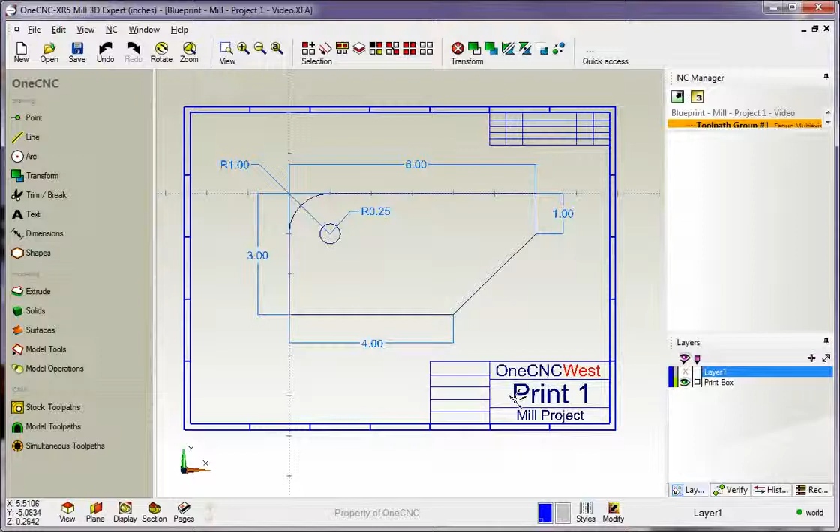Hello, this is Patrick at OneCNC West, and what we're going to do in this training video is start to take a look at creating parts using OneCNC geometry.

A lot of times you might be getting your part files already created using electronic file formats like IGES. But in these examples, I want to show you what it's like to simply create geometry within OneCNC. You'd probably have something like a blueprint, maybe a Mylar. In my example, I've got our blueprint on a separate layer called Print Box. You don't have to do this, it's just for training purposes, so I'm on track as we're building our model here.

Another tip I'd like to point out is that with creating geometry, you always want to see if your parts have fillets and chamfers. If they have fillets and chamfers, save those for last, because OneCNC provides many tools for easily creating them. So we'll create this rectangle first, then put the fillet and chamfer in, and end the video by putting a hole right at the very center of this fillet.

If we look at the blueprint here, we can see that the dimensions are 6 inches by 3 inches. I'm going to turn the blueprint layer off. For more information regarding layers, check our layers video dedicated to that on this training CD. So we want to create this rectangle 6 by 3.

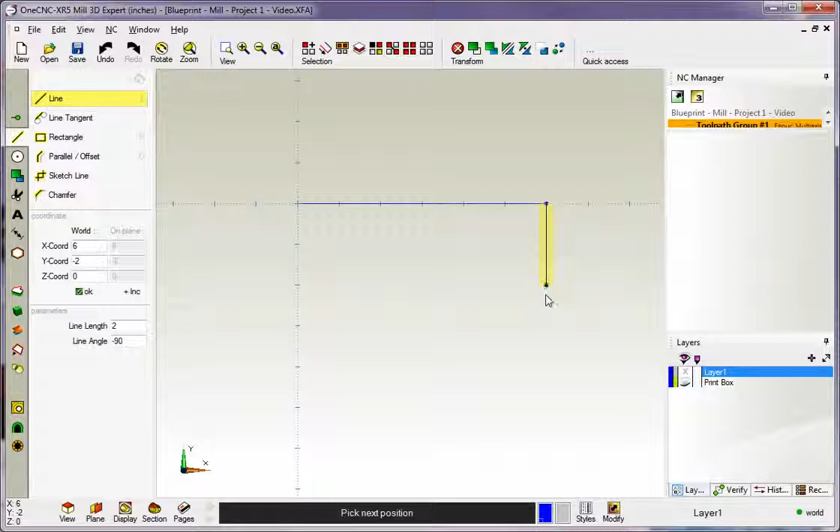There's lots of ways to do that within XR5, let me show a couple of them. First off, I'm going to head to Line. Because our dimensions are fairly simple, 6 inches and 3 inches, we can just digitize this by grid snapping. I can left click the datum, come over to 6 inches and left click, come down to -3 on Y and left click, back over to X0 left click, up here left click, and when I'm done right hand mouse click. That's one technique. Now I'm going to undo this.

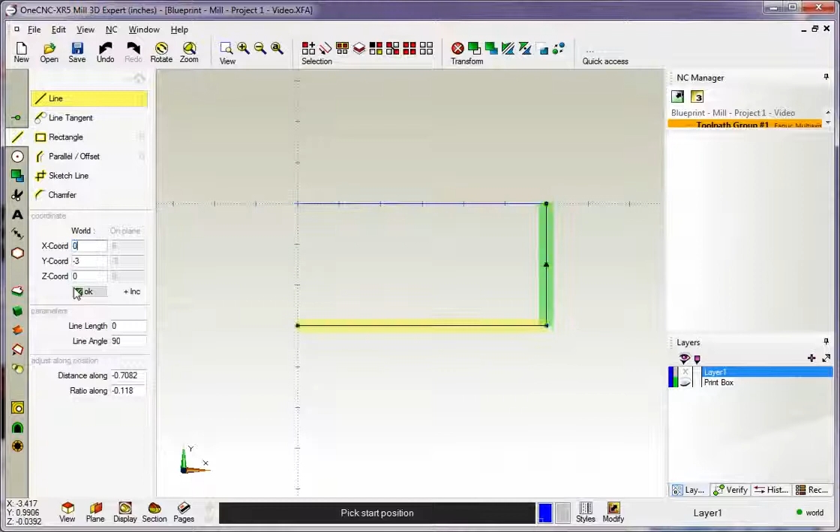Let me show you how to do this using coordinate input. We'll go to Line, starting at X0, Y0, Z0, click OK. Now I type in 6 inches, that's the next position for the line, click OK. As I type in different values, the field turns green, showing me I've typed in new information, and it stays green until I click OK. Now we go back to X0, click OK, back up to Y0, click OK. When we're finished there's really nothing else to do, you can right hand mouse click or select a different option.

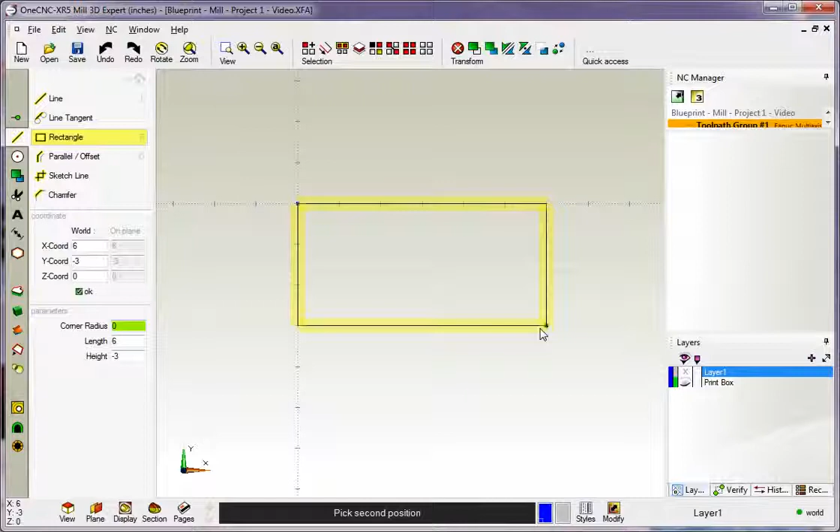Let me show you just yet another one. If you're going to create a rectangle, we definitely have a tool dedicated for creating rectangles, also located within Line. We can select rectangle. You can use coordinate input, but I'll speed things up and just left click the datum, drag it over to X6, Y-3, left click, and that's it. Just right hand mouse click to finish. So if I bring my blueprint layer back up, you can see that we're right on track.

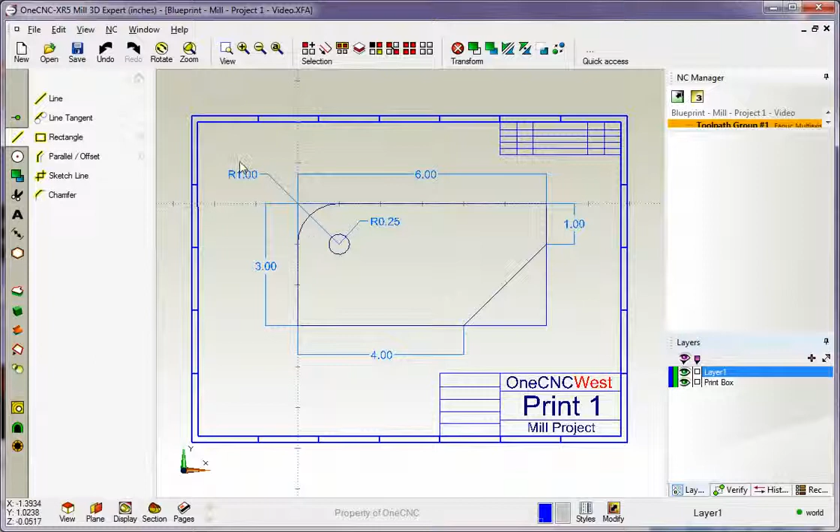That looks good. Now if we look at the chamfer, we can see that this line here is 4 inches, so 6 minus 4 is 2 inches here. And if we see 3 inches and 1 inch, really what we have is just a 2-inch chamfer placed on here. And up here we have this fillet, which is a 1-inch radius fillet. Let's put the fillet in next.

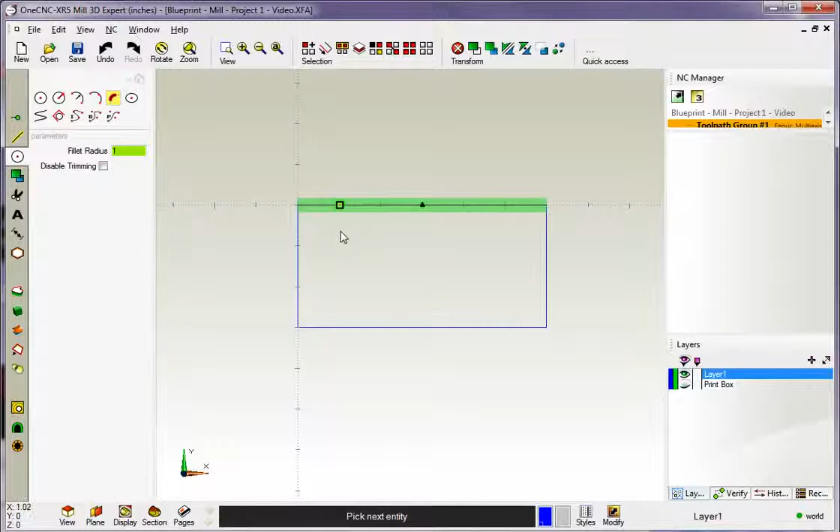I'm going to turn that off. Let's head over here to Arcs. We select arcs because a fillet is a type of an arc. This is what your screen will look like, and you'll see the name fillet there. I just have limited screen capture area here. We're going to grab our fillet tool, and the radius for the fillet is 1 inch. It doesn't matter which one of these lines you digitize first. I'm going to left click here, and as I come down I get a nice preview. I'll left click, and when we're finished we can right hand mouse click. So that's looking good also.

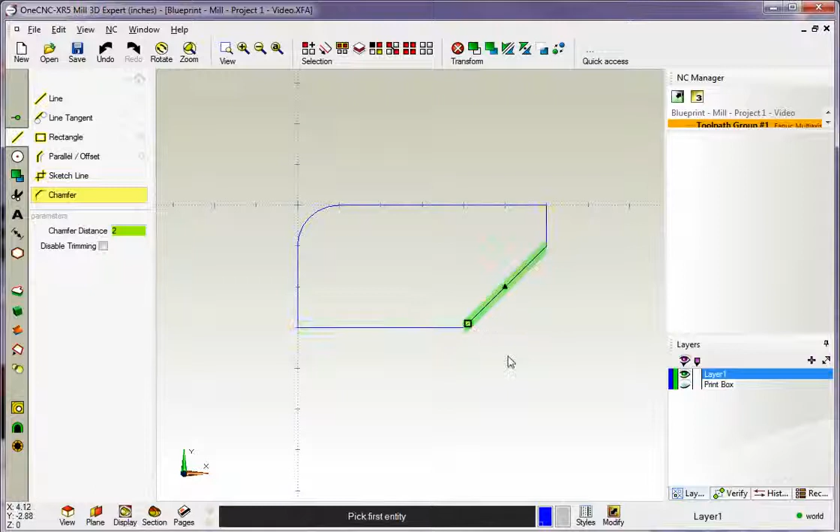Alright, now let's put our chamfer in. We're going to go to our line tools. Here's chamfer, and we've got a chamfer distance. I'm going to type in 2 inches for that, because this distance here is 2 inches and that distance there is 2 inches. Again, it makes no difference which one of these lines you digitize. I'll left hand click here, left click there. That looks good, so I can right hand mouse click or select a different option to finish. Let's check that up against our blueprint.

That's looking really good. And now we have a hole to put in here. This is at the arc center of this fillet, and it looks like it has a radius of 0.25. Okay, so let's build that. We're going to come over here to our arc tool, and down here this gives us a diameter, and our blueprint gave us a radius. So I know it's easy to figure out, we can say okay, 250 times 2 is a half inch.

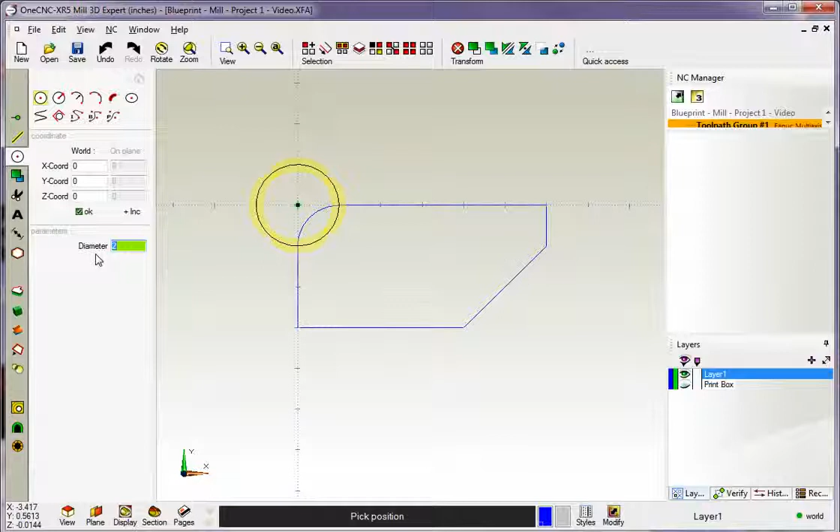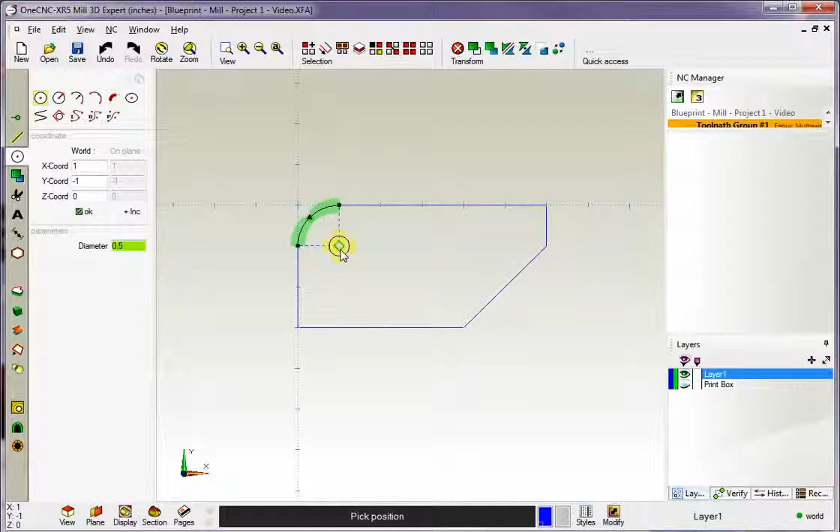But I want to point out that whenever you have numeric fields within OneCNC, you can type in a formula. So I'm going to type in 0.25 times 2, and if I hit the equal sign on the keyboard, OneCNC will figure that out. Now to place this at the center of this arc, it's really easy, not a problem. You just come over, wait till you see that little diamond symbol, that shows us we're at the arc center. Just left-hand mouse click and we're finished, so we can right-hand mouse click or select any other option.

So there's our very first part, and it was very simple to put in. Lots of ways to create the geometry. If we match this up against our blueprint, we can see we were right on track there. Alright, thank you so much for watching, and I look forward to seeing you in the next video.